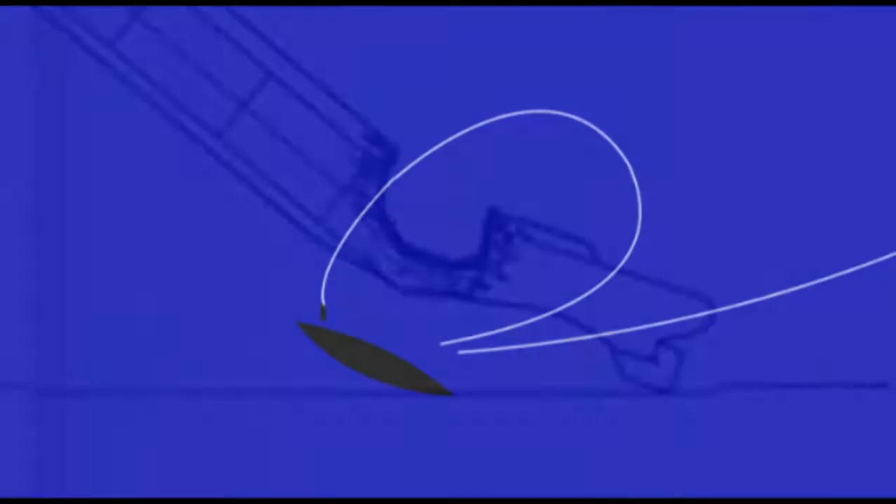He watched as his own torpedo slammed into his stern, blowing the Tang open and plunging her stern to the ocean's bottom in a moment. O'Kane and the bridge crew, plus 1 from the conning tower, were thrown off the Tang as her bow pointed to the night sky and slowly sank.

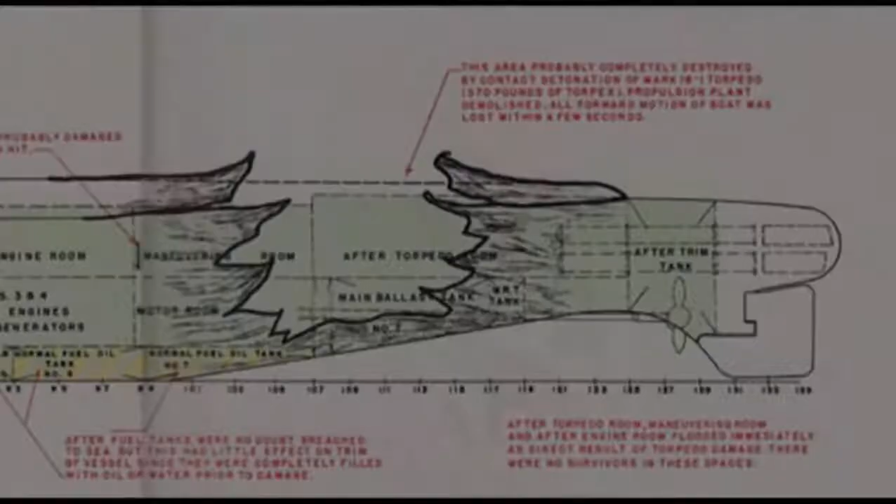Inside, the last 2 compartments of the Tang were completely destroyed, and everyone from the aft engine room to the stern were dead. Those in the forward engine room shut their bulkhead against the flooding seawater and worked their way to the only hope they had left, Momsen's lungs and the escape trunk in the forward torpedo room.

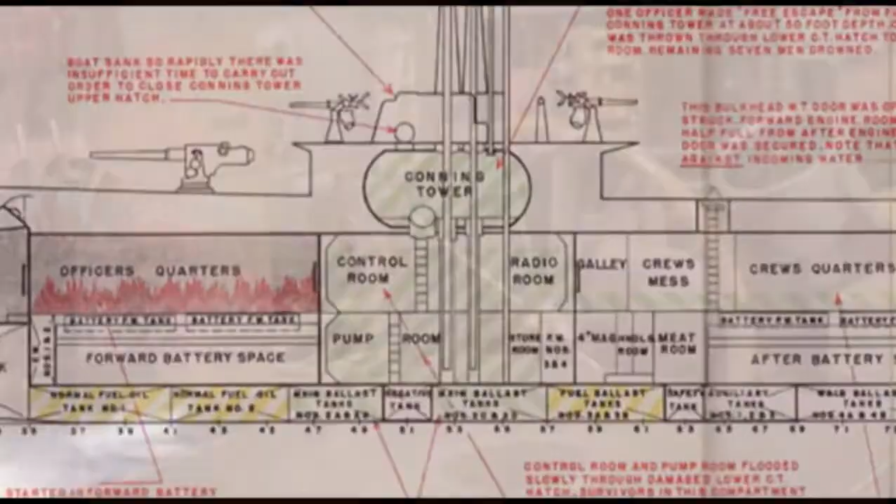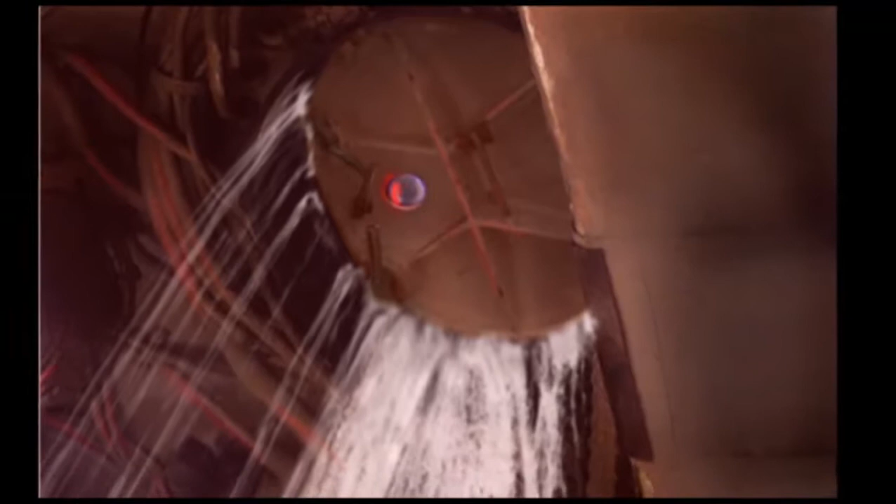They waded through the slowly flooding control room. That hatch had been open when Tang was hit, but one officer had been able to shut the hatch to the conning tower. But it didn't seal tightly enough, and it rained water into the control room, filling it, but slowly enough that the men could wade through to the bow.

In officers' country, the officers quickly burned all the confidential documents and herded everyone into the forward torpedo room. A few of the 45 men that now remained of Tang's crew were all right, but some had broken bones, some internal injuries, bruises, and contusions. Some of the most injured had been stretchered to the torpedo room in blankets.

The Momsen lungs were passed out, but before the escape trunk could be opened, the Japanese escorts suddenly converged and bombarded the Tang with depth charges, trapping the men for over 3 hours. Worse, the depth charges sparked an electrical fire in officers' country, where the forward battery was located. The pressure from the fire and perhaps impending explosion started to warp the bulkhead door into the torpedo room. There was little time left.

13 of the 45 men managed to escape using their lungs in 4 shifts. Men from that final shift said the heat and fire from the officers' country was so intense that the paint in the forward torpedo room was starting to blister and melt running down the walls.

Of those 13, at least 8 were later seen on the surface, but only 5 managed to swim until dawn. Of those swept off Tang's bridge at the very beginning, 4 managed to do the same, leaving just 9 of Tang's 87-man crew. Their only consolation? The transport they had aimed for was now sinking.

At dawn, these 9 men were picked up by the convoy that they had attacked earlier that night, and some of the survivors of Tang's torpedoes had already been rescued and were on board. The Tang survivors became POWs, and all 9 were repatriated after the war.

The Tang is the only recorded instance of the Momsen lung being used for submarine rescue. Japanese records now reveal that their military divers were actually sent down to explore the Tang wreck on November 28, 1944, but they did not at that time enter the submarine. More dives were planned in 1945, but by then the tide of the war had turned. While the coordinates of the wreck of the Tang were recorded, Tang's wreck has not officially been rediscovered since.